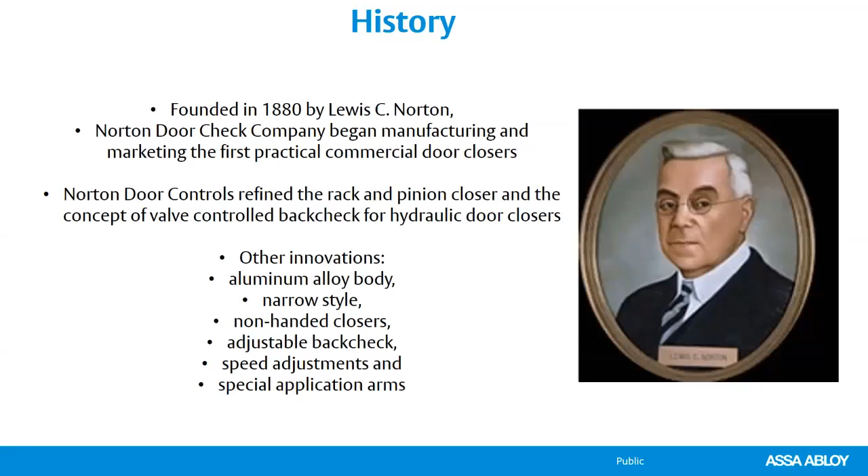Today we're going to talk about surface-mounted door closers. We're going to cover two different technologies: a rack and pinion closer, which is your standard door closer that you see out there, and also a cam action closer. Norton does a really good job of giving you sheets that tell you which closer model you should be looking at depending on your use, as well as the features available with that closer. So if you're looking at the vast array of closer options and trying to figure out which one to go with, we'll give you some tips and tricks on that. There are product selector guides like this, and I'll show you how you can find those online.

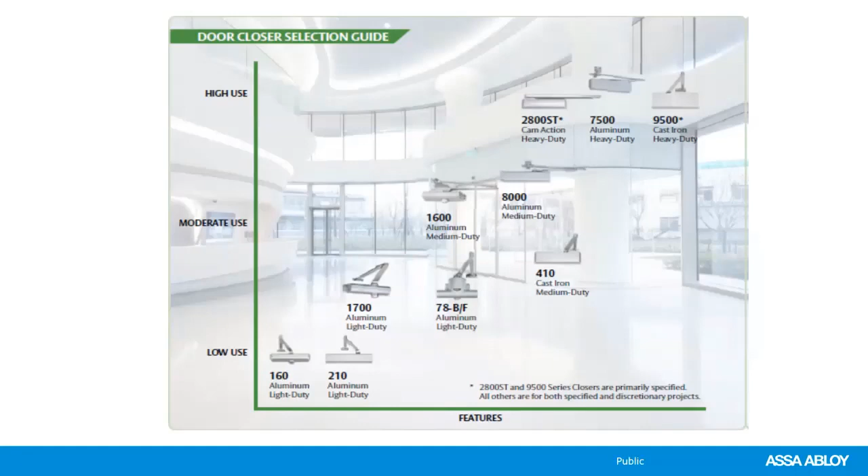They also have others—again, strength and quality versus functionality, durability versus features—to help you figure out which door closer is perfect for your situation.

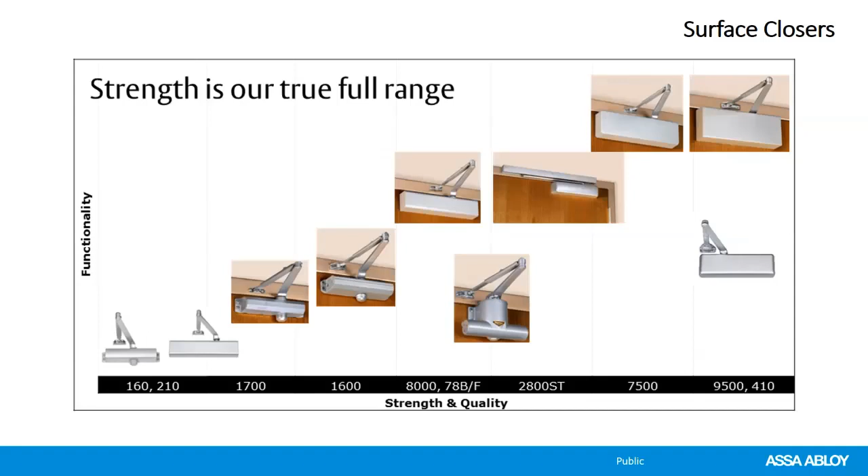First we're going to talk about our cast iron door closers. We're going to watch a video here in just a second that explains exactly what's happening inside a rack and pinion door closer—every time you open it and it closes, what's actually happening. So if you're a project manager walking a job site and door closers aren't working properly, this will give you an idea of what's happening inside. Then I'll talk a little later about some other things you can check.

So we're going to watch this video. It's about two and a half, three minutes long. We'll come back, I'll talk about the video for a minute, and then we'll get into some of our specific models.

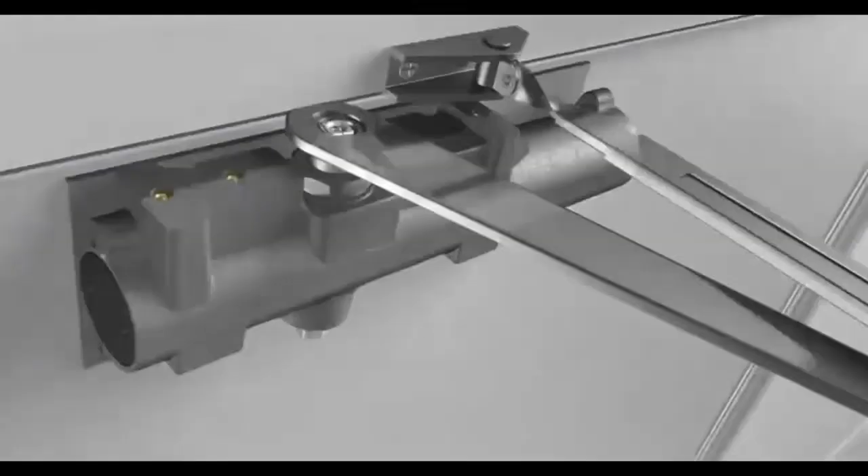Cast iron closers from Assa Abloy are rugged and reliable, providing millions of cycles with minimum maintenance. But the true durability test comes during those inevitable times when extreme forces are applied to the door and the door closer. Our single-piece construction provides uniform strength and wear resistance and eliminates potential leak points. Let's look inside to see what makes this cast iron closer so durable.

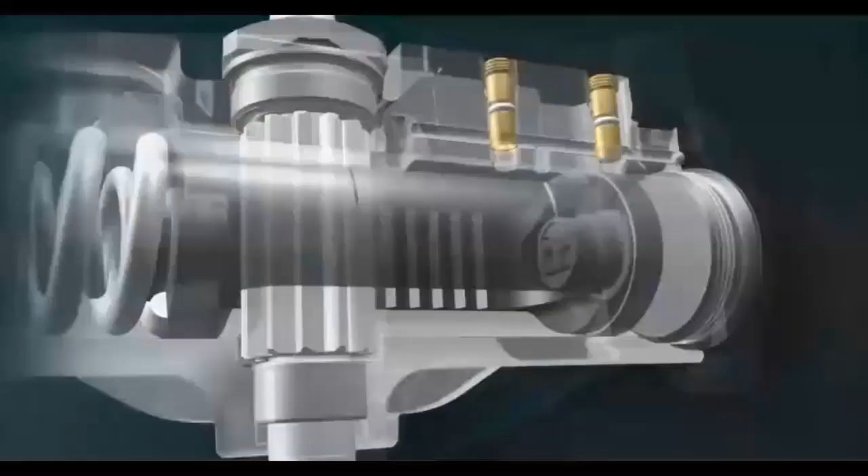Here's the basics. Each time the door is opened, the closer arm turns a pinion, which moves a piston inside the fluid-filled chamber. The speed of the piston is controlled by fluid passing from one side of the closer to the other. The valve controls the speed.

When the door reaches about 70 degrees open, oil begins flowing through the back check valve, gradually increasing the amount of pressure required to open the door farther. This cushioning effect is called the back check function.

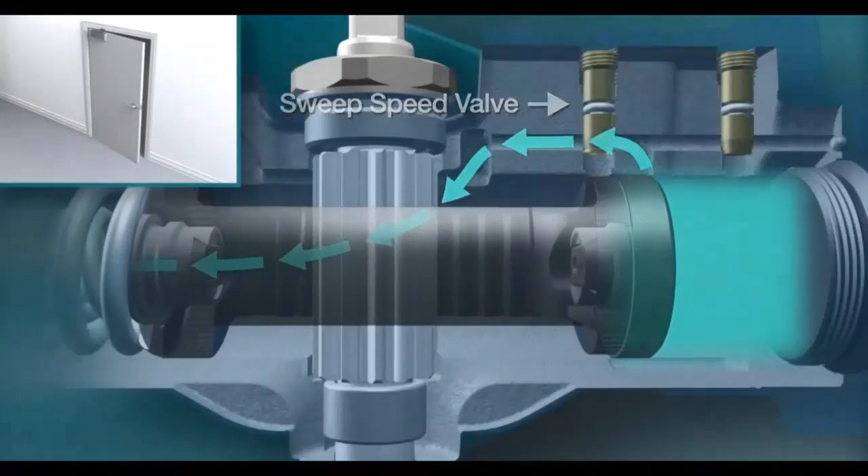When the door is released, the stored energy in the spring pushes the piston back. The fluid is now routed through valves that control the closing speed of the door. The sweep speed valve meters the oil flow from wide open to within about 7 degrees of closed. The latch valve then takes over, controlling the last 7 to 10 degrees of the closing swing.

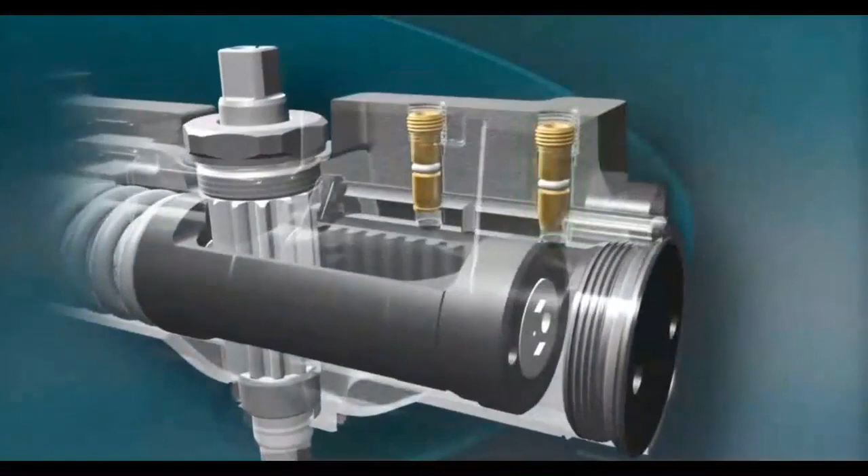The latch and sweep speed of the door can be increased or decreased to obtain the desired door motion. The spring adjust screw may be adjusted to obtain the appropriate closing force and accommodate varied door sizes and latching hardware. Our cast iron closers have easily accessible valves for adjusting back check, sweep, and latch speed functions.

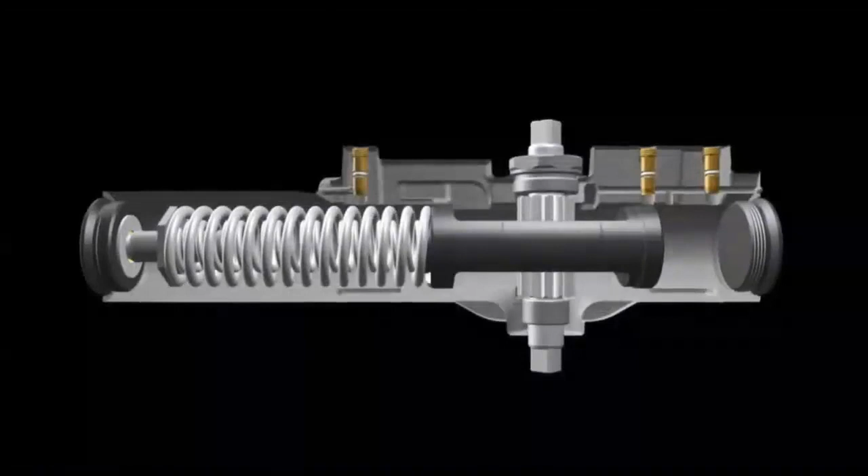During the closing motion, internal pressures seldom exceed 50 psi, but some doors are located in high abuse situations. Examples might be a city high-rise on a windy day, or school doors that children constantly force to close. In cases like these, extreme pressure builds up inside the closer body. With no way for the pressure to escape, that force can damage the closer, the door, the frame, and the mounting hardware. This is why our unique self-regulating pressure relief valves are so important.

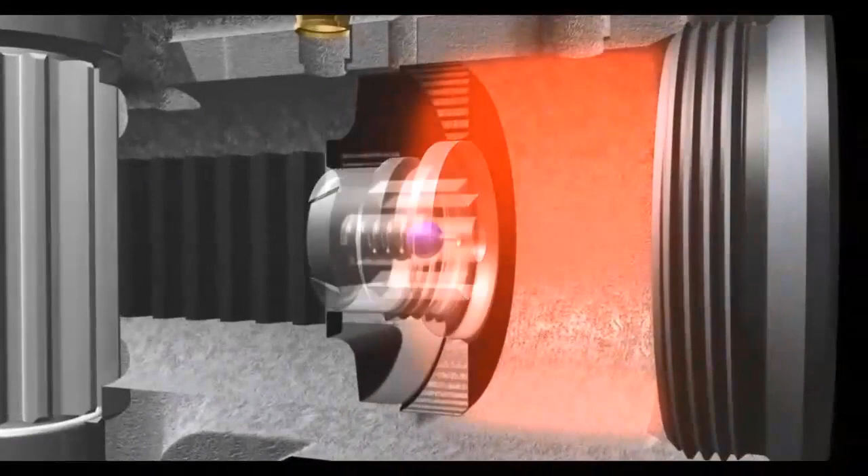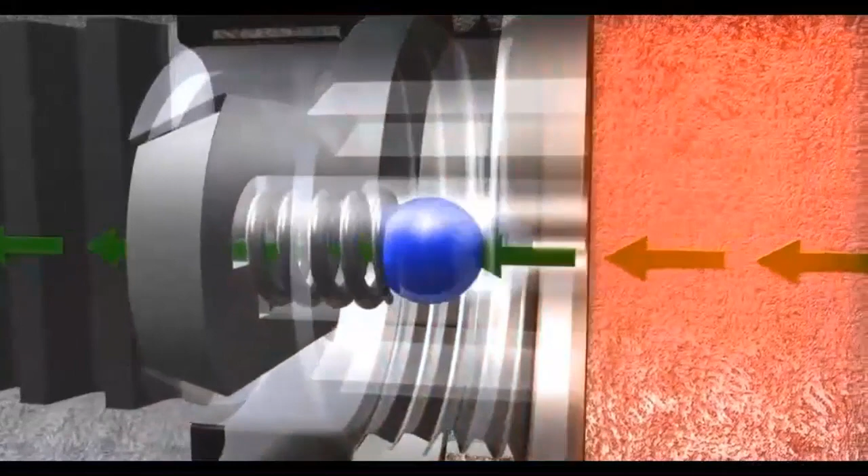Under abusive conditions, the pressure relief valve on the end of the piston senses the extreme pressure and automatically meters the fluid to achieve more normal pressure levels. The self-regulating pressure relief valve cycles rapidly during extreme pressure events to maintain control of the door. Once normal pressures are achieved, the pressure relief valve is no longer active, but ready for the next time the closer is abused. By releasing this pressure, the valve acts as a shock absorber, preventing damage to the door closer, the mounting hardware, the frame, or the door itself.

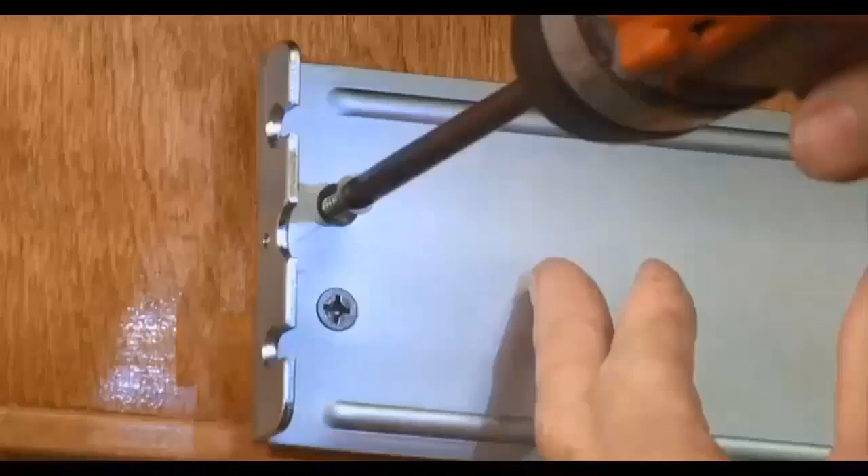Another unique feature for our cast iron closer is an independent mounting bracket. This bracket allows easy and accurate alignment. Simply install the bracket and attach the door closer. One-piece cast iron construction, the unique pressure relief valve system, and the independent mounting bracket—these are just some of the reasons our door closers last and last, cycle after cycle, year after year after year.

So that was our cast door closer. There were some specifics only found in cast iron door closers, but if you look at that door closer as a whole and just think of it as a rack and pinion door closer, then most door closers out there function that way.

Now the valves on different models may be in different places depending on what brand you're looking at, but if a door closer has latch speed, sweep speed—also called closing speed with some brands—a back check, and a power adjust, they would function about the same way.

Now, door closers are not built the same as far as the material they're made out of, the size of the piston—meaning the size of the piece inside that's controlling that flow—also the makeup of the steel in the pinion, the material the valves are actually made out of, the size of the adjustment wrench for those valves. So there are several things that change.

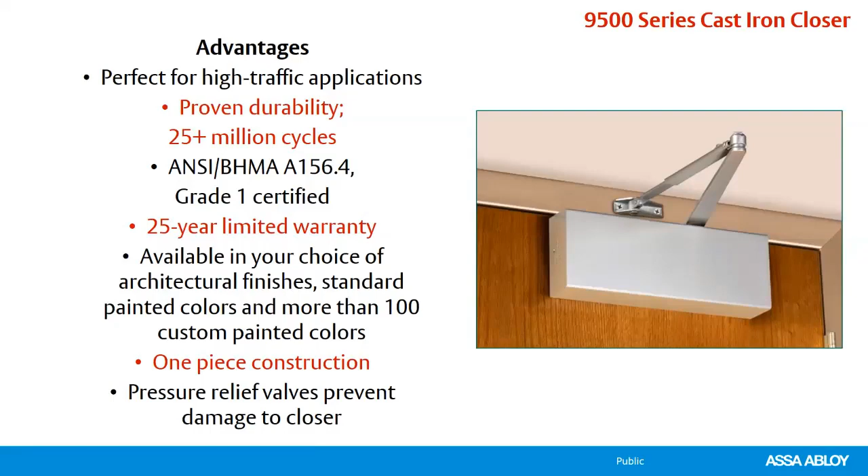Now, door closers are always handed to the frame, and they're not necessarily handed to the hardware itself. If your door or frame is a right hand or left hand, the closer would be handed to that. So we're not really concerned at that point if the closer is mounted on the exterior, on the push side or the pull side of the door. Closer is always mounted to the door and the frame, okay?

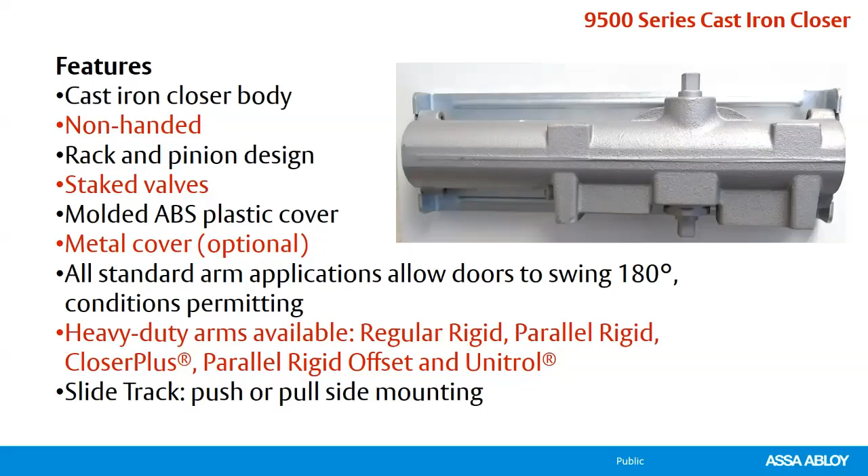We have several different closer models, and the higher priced, bigger, more durable closers are also going to come with more arm options. Some of those options are parallel arms, where if you just get the 9500, just part number 9500, by the finish, by the color that you want everything painted. It's a powder coated finish. You're going to get a tri-pack, and that's this up here. So that's parallel arm bracket, but if we take this bracket off, we can also use this arm for a regular mount or a top jamb mount. You could also get a tri-pack with a hold open, and that would be specified with an H in between the series and the finish.

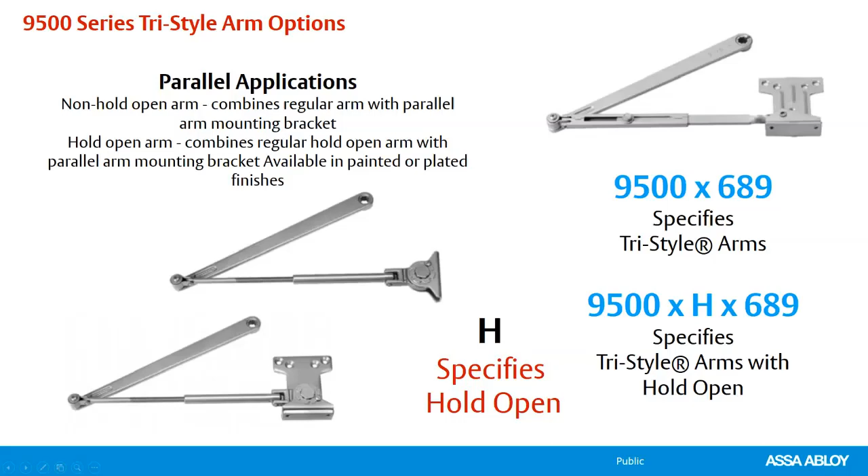If you're mounting top jamb, where I see closers mounted top jamb, that means that the closer body is mounted to the frame itself. The arm is mounted to the door, and that is on the push side. So where I see this is exterior doors, where the doors swing out into the public access in the direction of egress, where we want the most strength available for that door closer.

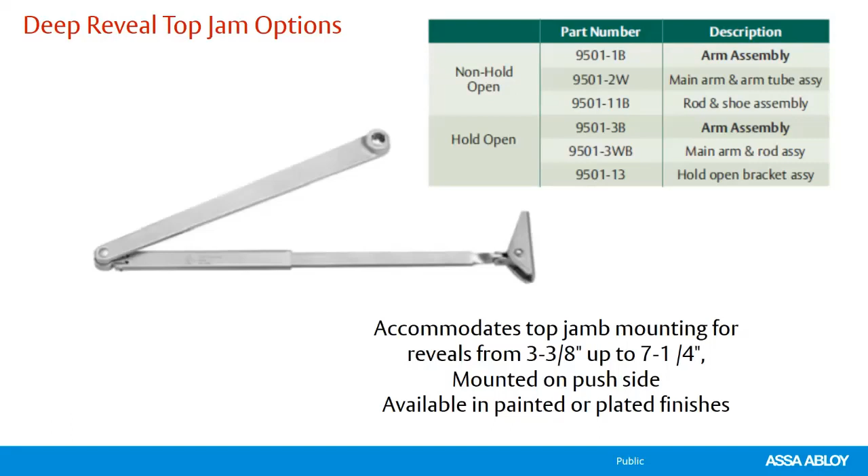So when we mean deep reveal top jamb options, we're talking about the distance from the face of the frame to the door on the push side. You need to measure that and make sure that the closer arm you're specifying with that model will accommodate that frame width. You can also get these arms that are rigid, heavy-duty arms. These are not adjustable, so the technician needs to make sure they do a really good job of reading the installation instructions and mounting that closer appropriately for that type of arm.

But these are paired with, if you pair this with our cast iron closers or even our Norton 7500 grade 1 closer, they're very, very durable. They last a long time. They're very rigid, and you would specify that as a PR. So parallel, P, R as in rigid. And you can get that with a hold open or a non-hold open.

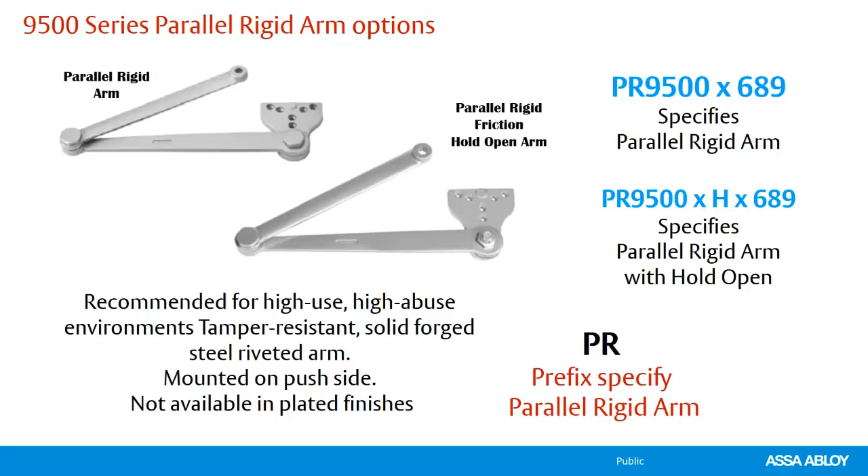A couple other arms I want to point out are the CLP and the CLP with a hold open. The closer plus arm is a rigid arm. If you look here on the screen, you'll see my cursor pointing at a stop. That's a hard stop, meaning if the door closer isn't adjusted properly and somebody swings the door open, it's going to come to an abrupt stop once it hits this. Now, this is removable - you could take it out completely, and you can also move it to the other side, so it's considered non-handed.

This is your holder option - a thumb turn where you can activate the hold open feature of that arm at whim. You need to make sure that if you're going to use this arm, you're not using it on a fire rated assembly. Even if that door is only rated 20 minutes, we can't have a mechanical hold open on that door, because if there's a fire, it needs to self-close and self-latch every time.

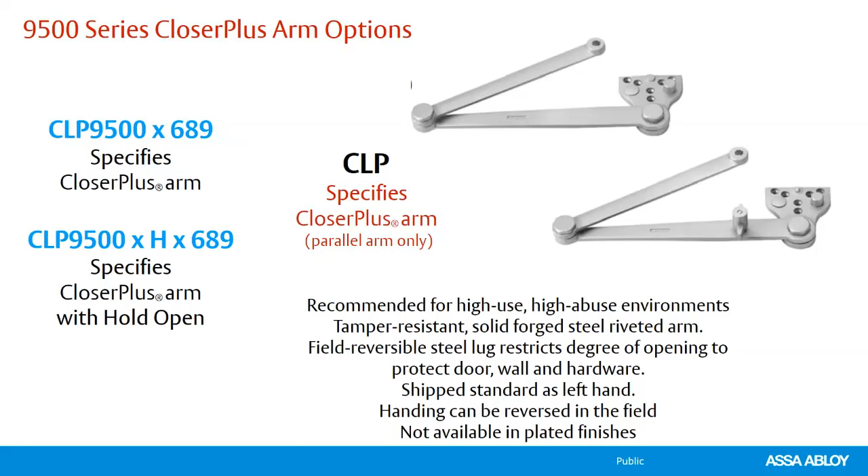If you have really high abuse areas and a really heavy door - your average hollow metal door weighs about 100 pounds, but you get beyond that up to around 250 range - I would personally recommend this Unitrol arm. I've used these myself in installations for years. They're awesome because they have a built-in spring, so when that door gets all the way to the stop position, that spring will absorb up to 30 pounds of that door force. We always need to ensure we adjust the back check appropriately for the door closer, but in combination with the proper adjustment and this closer arm, they work really well.

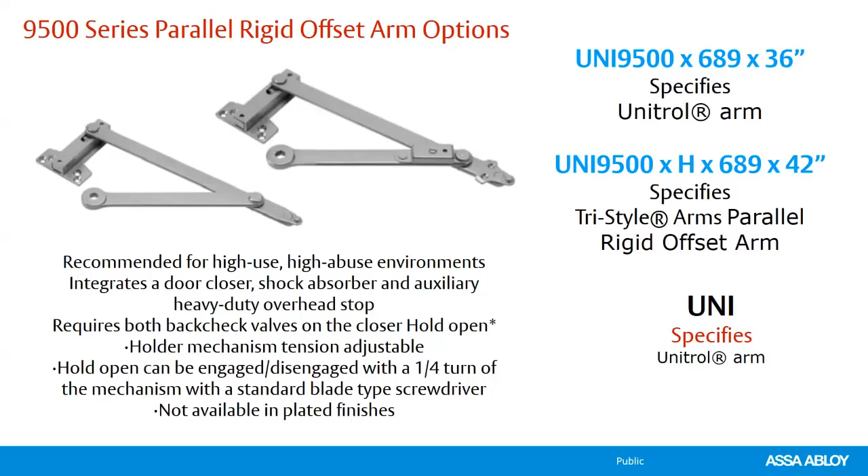Now the 9500 is also available in a slide track, either push side or pull side. You do need to specify the tracks are different. And in the sense of right hand or left hand, it will work on either, but you do need to specify push side or pull side to make sure you get the right one.

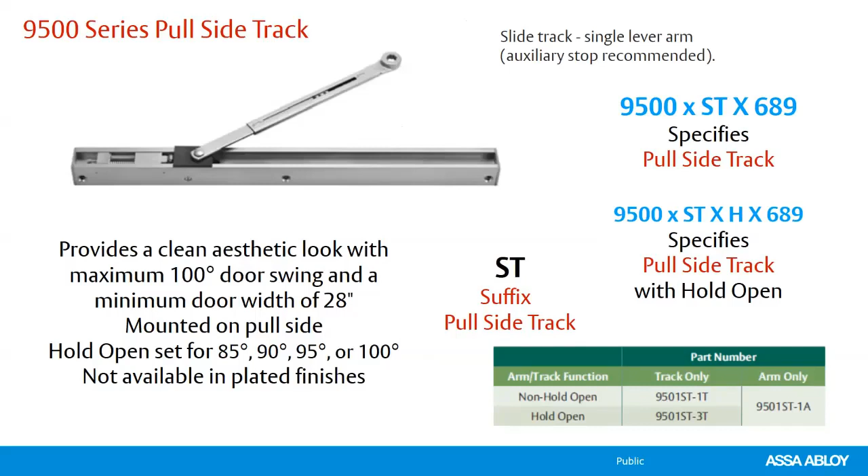These are also available in a hold open. So there's our pull side. As I mentioned, the plastic cover is standard - it's non-handed - but if you want a plated finish, you need to specify the metal cover, and that is handed.

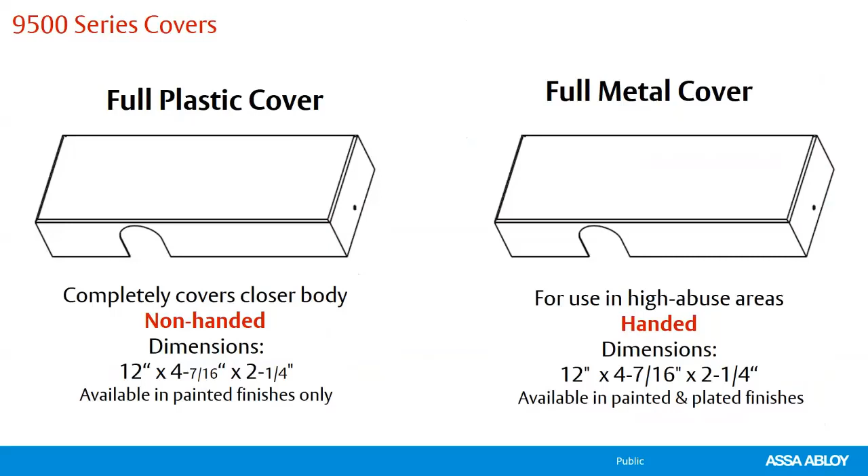We make drop plates for our door closers. Most of our models have this as an option, and as a previous installer, it's great when you get a drop plate for the specific door. If you have a door that you're mounting either parallel or regular arm, and it doesn't fit on the top rail because it's too narrow, this drop plate allows it to mount and makes it strong. Your door closer would actually sit down into the full light door. So you also have to think that you are going to see this drop plate through the door - if you're mounting parallel or regular, you would see it through the glass. That's something you have to think about.

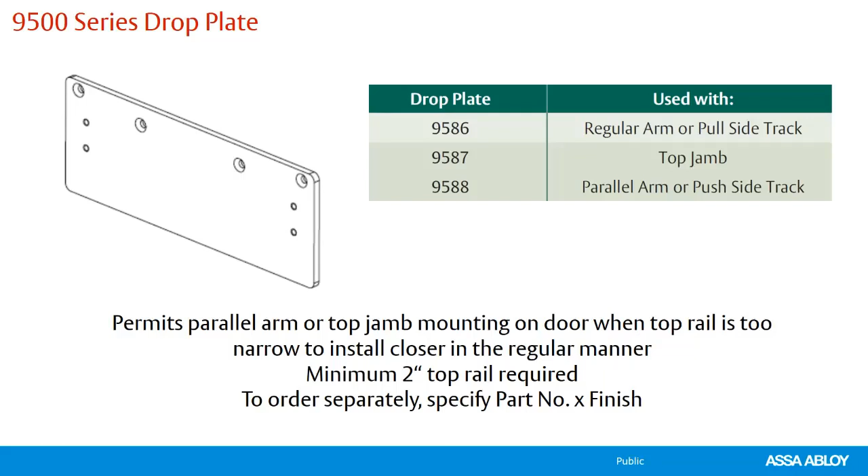At the end of all of our catalogs is a really good description of how we would order the door closers, with the prefixes, with the suffixes, with the body, and Norton follows this method all the way through all of their models.

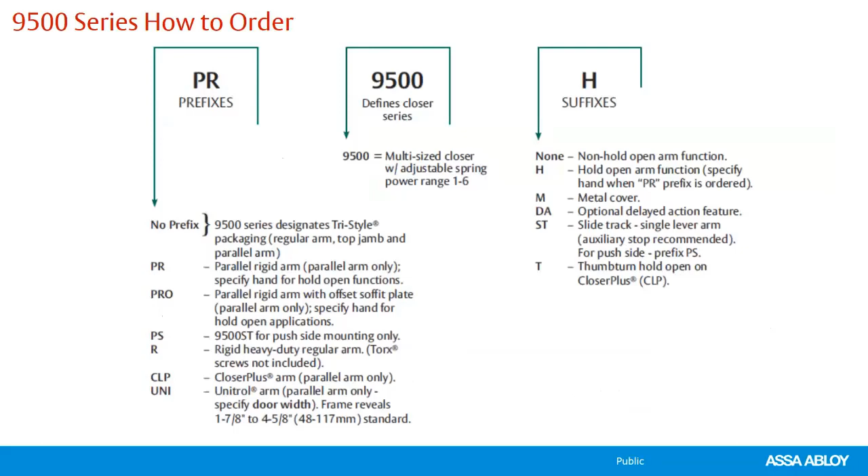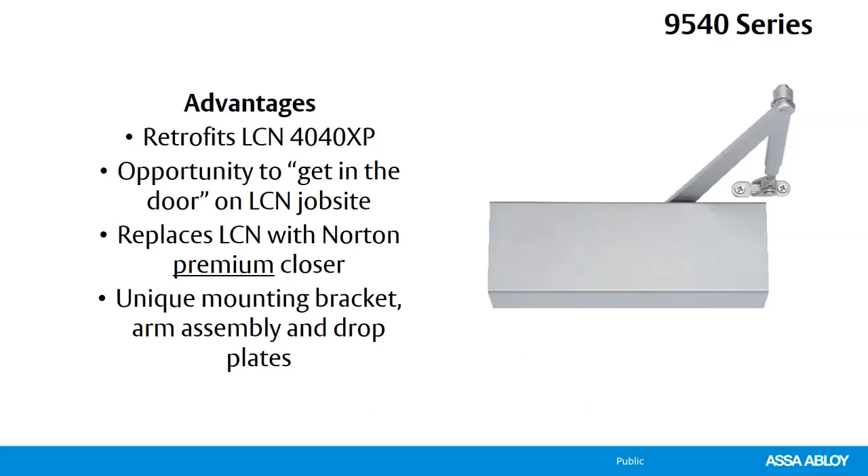Let's say that you want the cast iron closer, the heavy duty, the bracket mount, but you're replacing an LCN 4040. So the 9540 is the exact same closer as the 9500 series, but the difference is the bracket itself has different mounting holes, and it's designed to fit right over the existing holes that would be on the door for the LCN 4040 series. Same way we would order it.

Now the 410 series is also a retrofit for the LCN 4040, but instead of it being a bracket mount, this particular door closer actually has the mounting holes drilled through it that mount up directly to the holes for that closer.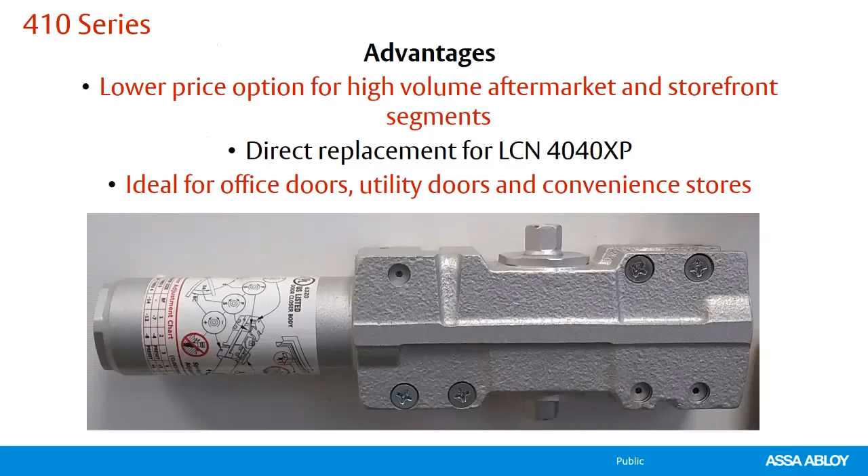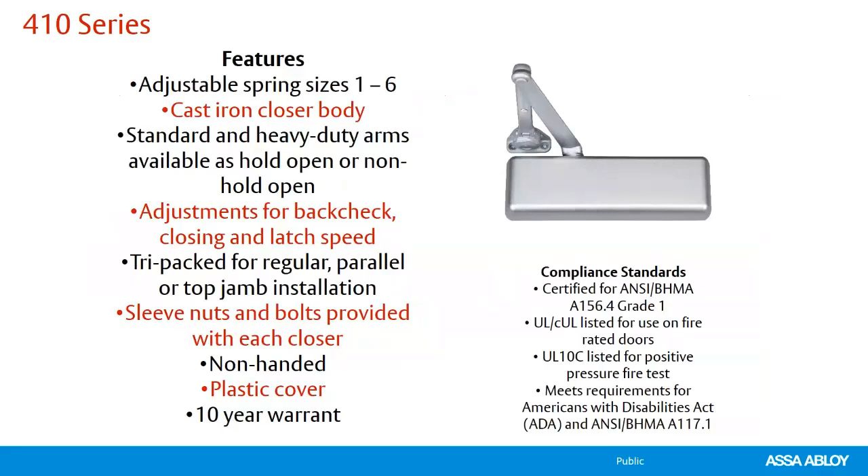10 year warranty, available in those standard mountings that I was telling you about - regular, parallel, top jamb, hold open, non-hold open. And again, the way that we order things follows through. Later on, we're going to show you how you can find all of these individual catalogs and how to navigate through them to get the information that you're looking for.

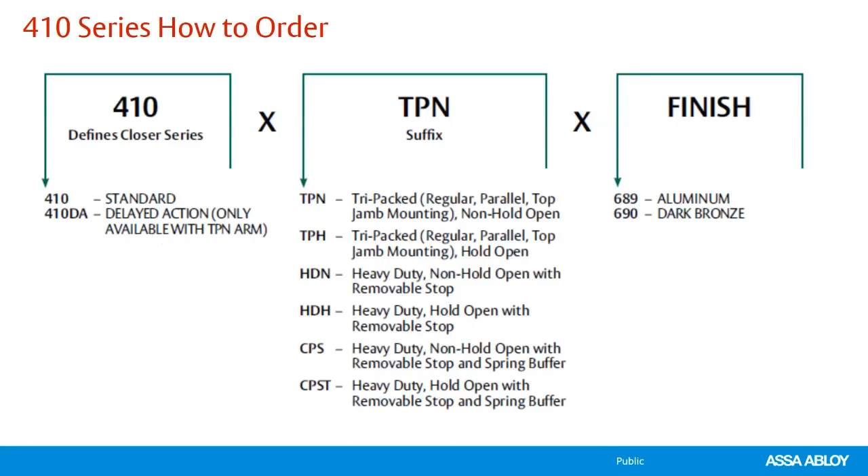So if we look at how we position these in the market, the 9500 is most often specified for new construction. The 9540 is a retrofit option where you need a really heavy duty closer and the customer has an existing LCN 4040 series that they're replacing.

We've got good doors and good frames, all we need is to replace that closer. And if you're looking for a little bit lower price point but the same footprint—we're not a bracket mount now, but we're still a cast iron closer—then you're looking at the 410.

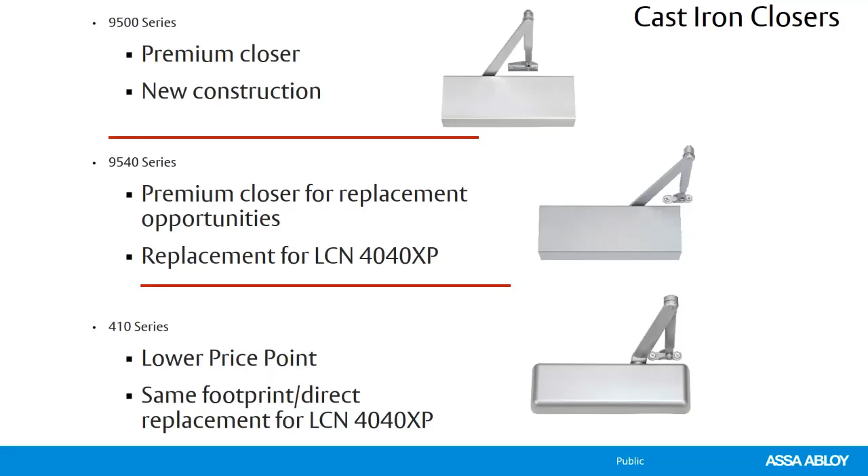So moving on to aluminum door closers from cast iron. Aluminum is a fantastic material, just like cast iron. We see them in BMW engines and all kinds of stuff.

The 7500 series is also available with our flash ship program, stocked in several different configurations. So check your local flash ship program for the Norton 7500 series. This is for high traffic situations and applications, again with a 25-year warranty, just like the 9500.

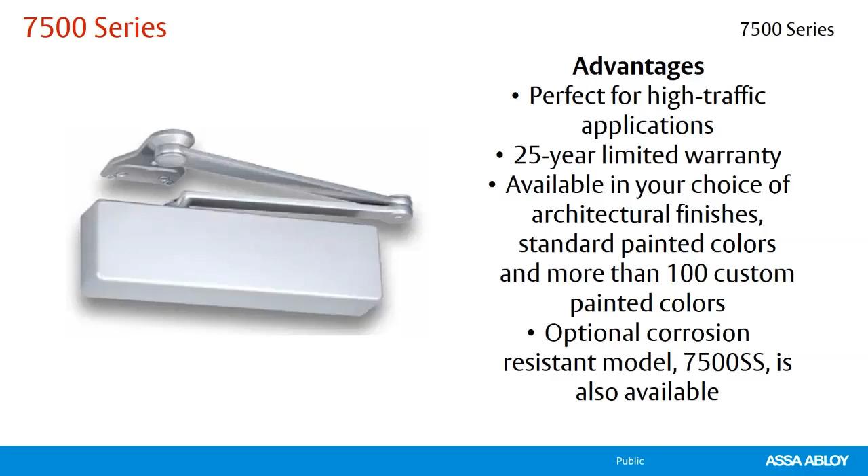We have an option of doing corrosion resistance with the 7500 SS. And when I mean corrosion resistant, I'm not talking about putting any of our closers, this one included, on the exterior of a building. I'm talking about if you're in an indoor swimming pool where the chlorine likes to eat everything around it that's made out of metal. Or you're in a chemical plant, pharmaceutical companies, places like that where they're dealing with moisture, spraying down floors, food service. You can get this extra coating and it helps with corrosion.

This door closer, along with the 9500 series, is available with a back check position valve. Back check, remember, is to slow the door when it gets opened right around the 70-degree mark—that's where our back check valve starts to engage. Of course it's adjustable, but if you have really high abuse, lots of wind, you can make that back check engage a little bit sooner than it would otherwise.

We also can have what we call delayed action—if we look here, it says DA for delayed action. Let's say that we're moving hospital beds, carts, or ladders through the door, something like that. That delayed action can keep that door open for up to 4 or 5 minutes, depending on the angle in which we open the door.

But most of the time these doors are going to be opened to, let's say, 90 degrees. That gives you about a 2-minute window where that door will just barely creep closed. Once that 2 minutes is up, then it switches to your regular sweep closing speed valve, and then your latching speed as normal.

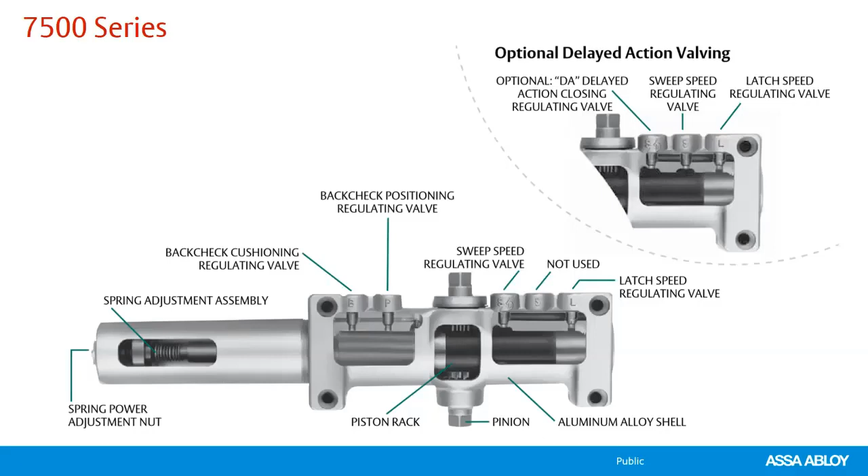Still available as adjustable 1 through 6. We have staked valves—the 9500 does as well. And staked valves just make sure that it's really difficult for an installer to accidentally turn a valve the wrong way. So let's say that you're adjusting a valve with your hex wrench, turning it, you think you're turning it clockwise to slow the door down.

But because you're working kind of upside down and your hands are up on the top, you may actually be turning it counterclockwise. I've seen it multiple times in courses where people think they're going one way, but they're actually going the other. And those stakes help prevent that valve from being removed.

I remember just a few years ago, about 4 years ago, I was doing a training class. I was working with one group of students on a door closer, we had another group working on another door. They did just that—they forced that valve even past the staking, turned it really hard, got that valve all the way out, opened the door really fast, and then squirted oil all over the ceiling of the training facility. It's kind of funny at the time, but it proved a point.

The stake valves are definitely necessary, but if you work really hard, you can get that valve out. Now, if the doors are leaking oil—and I think everybody on the call has probably seen a commercial door that has oil dripping down the door, the glass—that door closer needs to be replaced. It's a liability issue. You never know where the air bubbles that are now in that door closer are going to work through a valve.

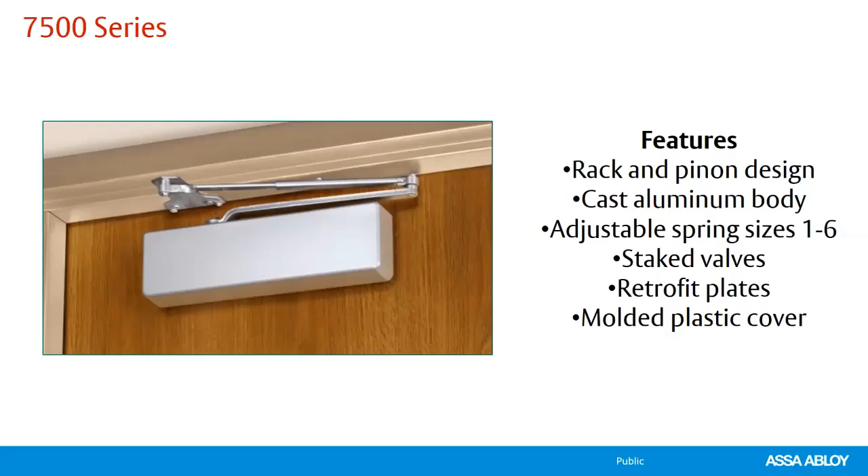That back check position I was talking about—that enhanced back check—lets you move and adjust that for doors that have a lot of abuse. And then our delayed action, this gives you an example of what we're looking at. If you template that door closer to 180-degree open and bring it all the way to the wall, then you can get 4 to 5 minutes of that closing speed delay.

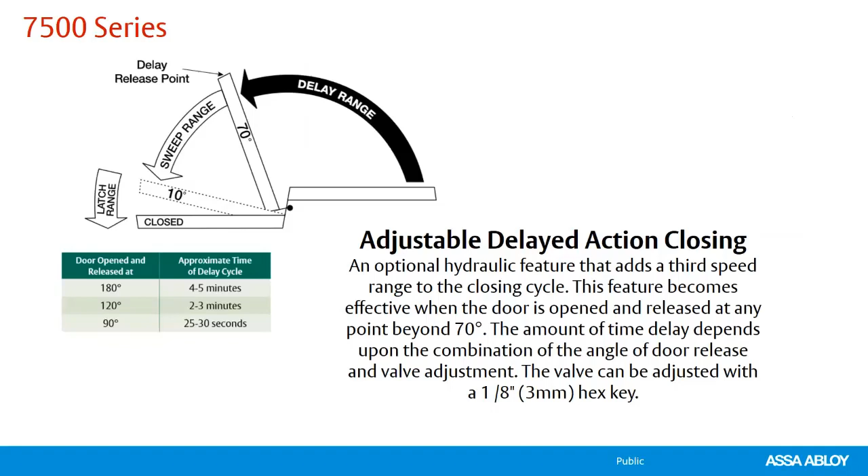As I mentioned earlier, the 7500 is available in a tri-style. So if you're stocking this closer, if you're buying this for a job and you're not quite sure what the customer needs yet, on what side of the door the closer is going to be mounted, everything you need for that is in that box.

Just because of the leverage of this arm sticking parallel off the face of the door, it has length to control the door. So if you have an exterior door swing, and you need all the strength available in that closer, I personally would recommend doing a top jamb if it's feasible. If you're able to mount that closer on the frame and you have a reveal that will work with your arm, top jamb will give you more strength to get that door pulled in and latched.

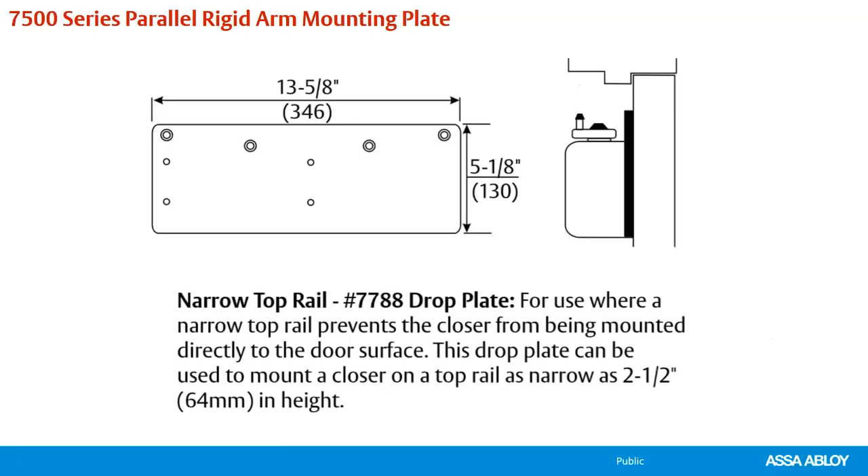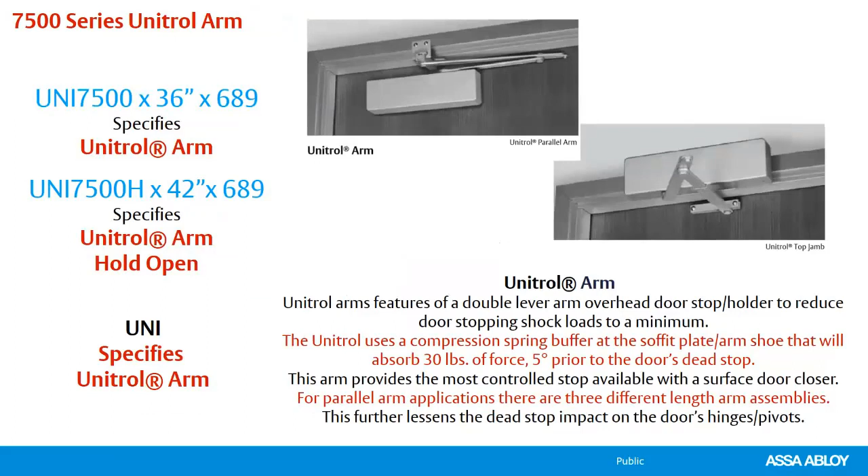The CLP, the Closer Plus arm, is also available with the 7500, as is the Unitrol arm, that arm that has the built-in spring to absorb some of that impact. Slide track, both a push and a pull side.

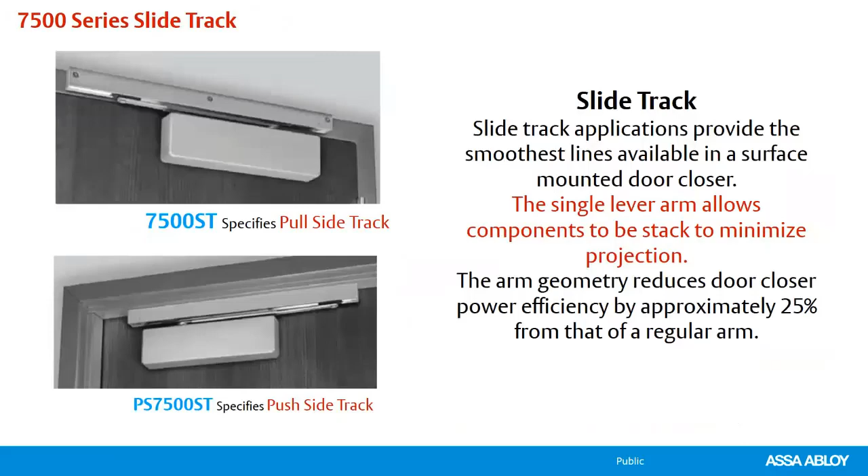In this chart, Norton is fantastic with charts. This chart tells you what type of fasteners you're going to get with the pack. And you'll see that with certain arms, some of these screw packs are standard, right? And some of them are optional.

If you have a door that is not reinforced, a wood door, flush wood door that's not reinforced, then you're going to want to through bolt it. If an architect specifies doors and distributor orders doors that do have the reinforcement, and then the technician goes ahead and puts through bolts, that may make somebody mad. I have seen where doors had to be replaced because they used through bolts, and the technician did not know that there was a reinforcement block for that closer to be mounted to.

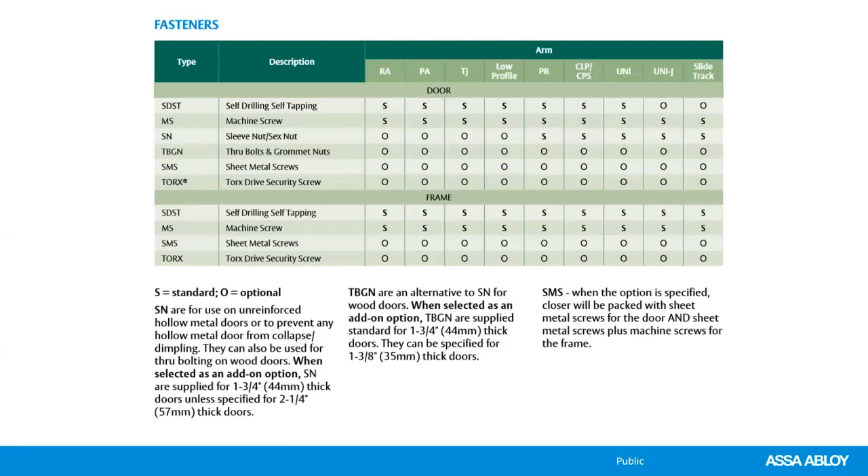So communication is key when you're going either through bolts or not. Personally, I like the through bolts, especially on wood doors, and even sometimes on thin hollow metal doors. There's just not a lot of material there for those screws to bite into. If you have high abuse, high use, those through bolts, or what they call sleeve nuts, are definitely a good addition.

We have a multitude of finishes and colors that you can get these door closers, either powder coated or plated. And if you have something custom, Norton does a lot of custom coatings as well. So if you want something that's a custom color for your high school basketball team, or for a professional stadium, they've got a lot of options. Just get in touch with Norton and they can tell you what the process is for getting that quoted.

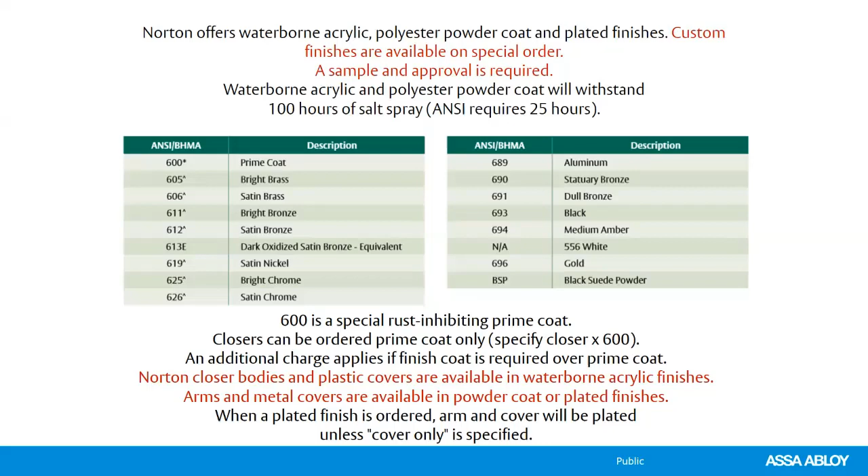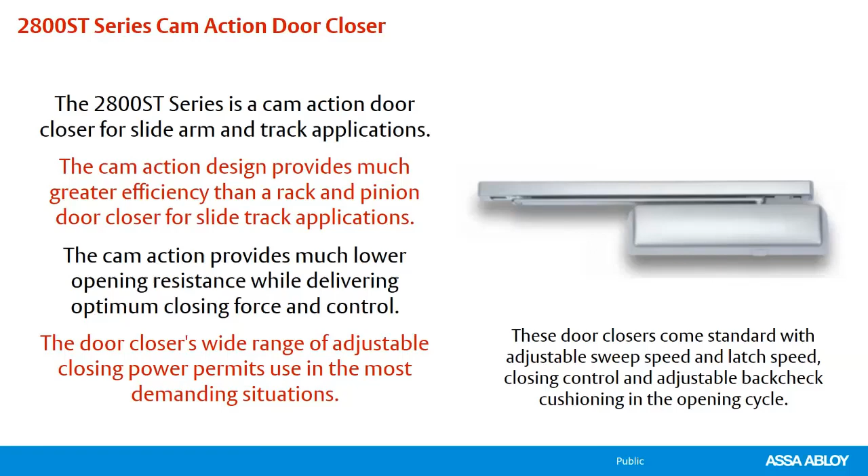Moving away from the rack and pinion closers for a second is the 2800 ST. This is a cam action door closer. Cam action door closers are super efficient. They don't increase in force on the user through the opening cycle, but on the latching cycle, they increase just at the very end to make it easy for the door to shut, giving it more strength. We're going to watch a quick video on that, explaining our cam action door closer.

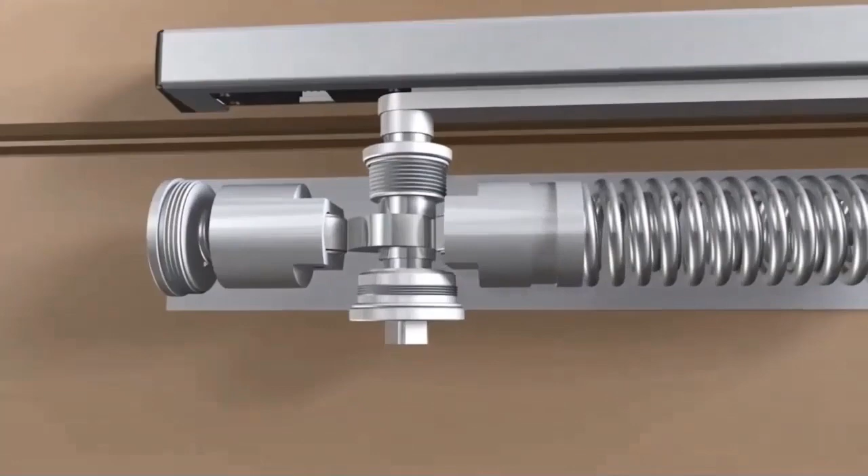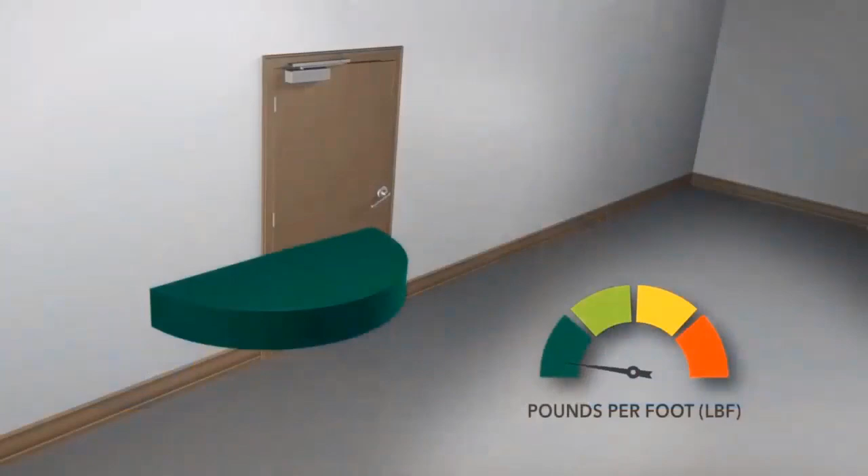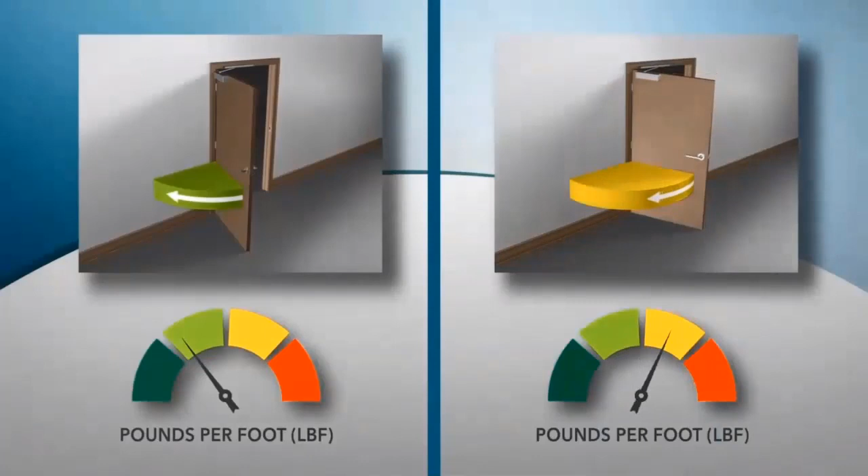The Norton 2800 ST cam action door closer features a revolutionary design that combines the aesthetics of a track-type closer with superior performance. Our cam action closers are incredibly efficient. The secret is this unique cam assembly. Closing forces are applied to the spindle through the continuously smooth surface of the cam and roller bearing follower. The combination of the piston and cam design greatly increases efficiency. The results are astonishing. On doors equipped with cam action closers, the strength required to pull the door open remains easy throughout the entire opening range. On doors using a rack and pinion closer with a track, the effort required to open the door rises exponentially as the door is opened.

There's also a difference in how each door will close. The cam action closer applies a consistent amount of force across the entire closing range, and the closing force actually rises at the last moment, right when the door needs extra force to set the latch. The force of a rack and pinion closer with track decreases as the door closes, providing the least amount of force at latch. Simply put, the Norton 2800 ST cam action door closer is the most efficient surface-mounted door closer on the market today. This means that a door equipped with this closer will feel light to open, yet still have plenty of power to overcome light stack pressure or other problems at latch. Norton cam action technology, combining the very best in aesthetics, performance, and innovation.

So where I see this used most often is when we want a super efficient door closer that is very aesthetically pleasing. The door closer kind of blends into the opening, and once you get it plated or finished in the color that you want, that can even help it disappear even more.

But if you think about the Americans with Disabilities Act on interior non-fire rated doors, you have a limit of 5 pounds force to open that door. So if I'm a user, come up to that door, unlatch it, and start opening it up, the amount of force cannot exceed 5 pounds. That's really hard to do on heavy doors, especially when we increase the power screw. That can get to a point where we're at 8.5, 9, 10 pounds of opening force. We'll fail an inspection.

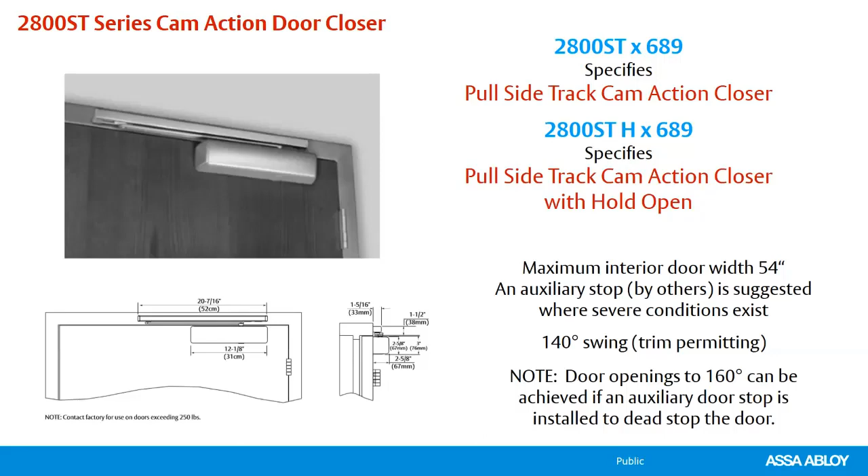Again, drop plates are available with most of our closers, and here's an example of how you'd build the part number string.

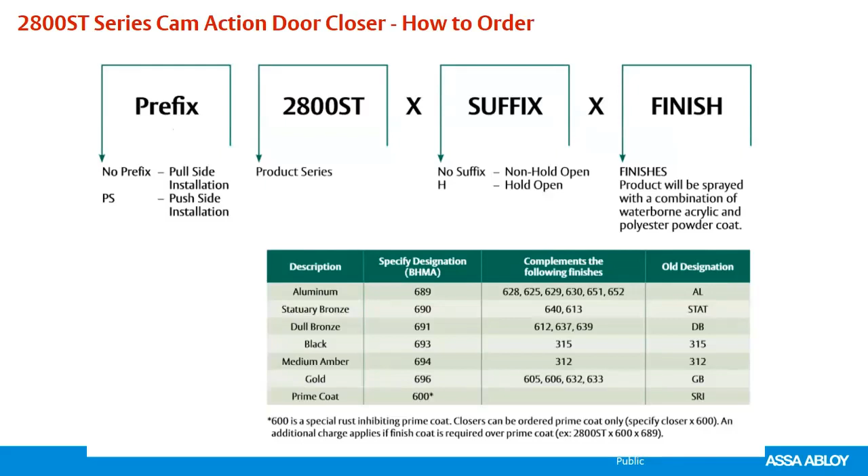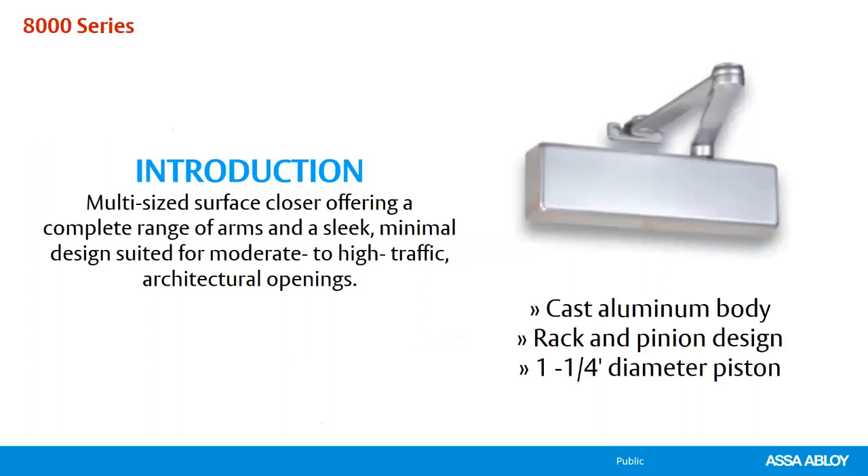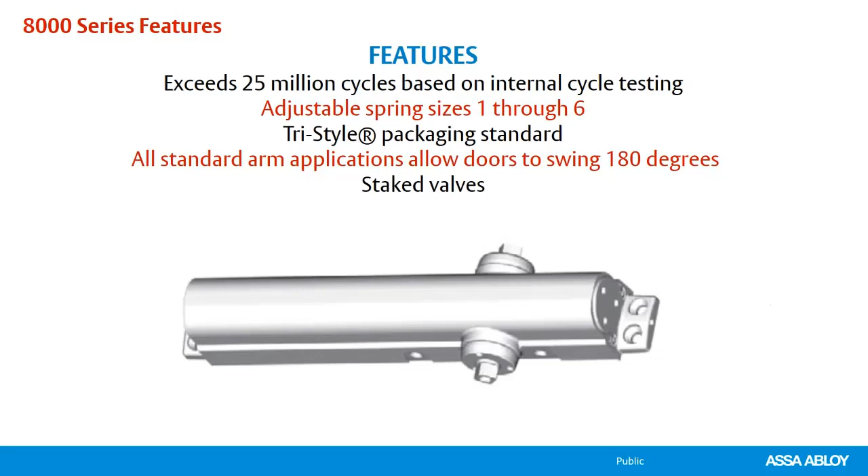Okay, moving on, the 8000 series — we're moving down on the cost and the usage from the 7500 to the 8000 series. It's very low profile, it's sleek. You can get it without a cover, or with a full-size cover or a narrow cover. There's a view of what the closer would look like without a cover. It's also the exact same mounting pattern as a bunch of other competitor closers, and we'll actually get to a chart later on where you can see exactly what I'm talking about with that.

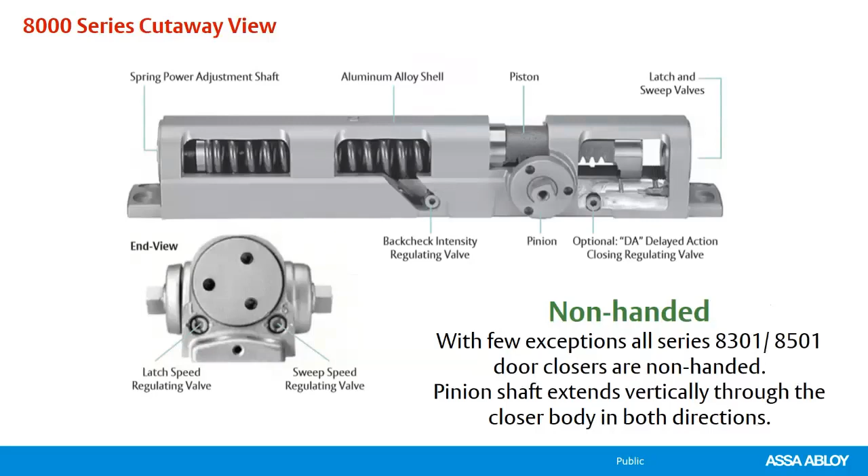Back check intensity valve is standard. Delayed action is an option. Your latching speed, sweep speed, and power are all standard.

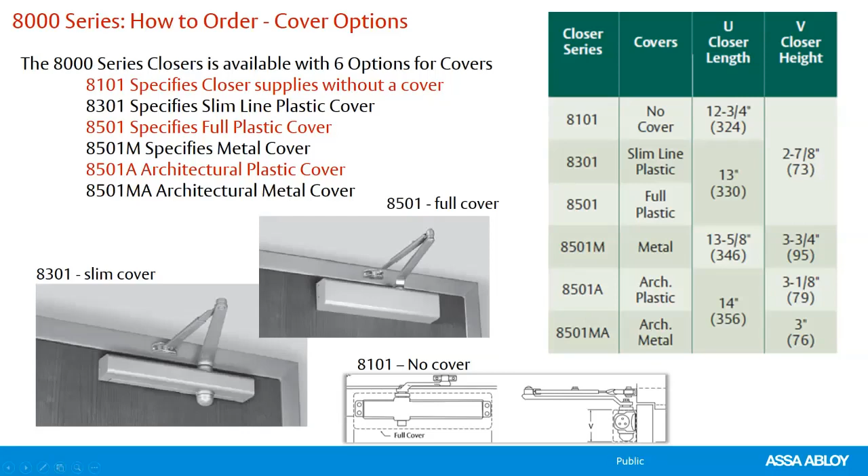And lastly, we're going to talk about the 78 series. This is considered a traditional closer, but some people call them a potbelly closer. Norton is one of the only manufacturers that still makes these, and year after year they're becoming more popular for those historical restorations of incredible buildings out there. When you want something that looks the part but has some modern components and modern functionality, this is a great option. As well, you can get these with a corner bracket that will work on arched doors.

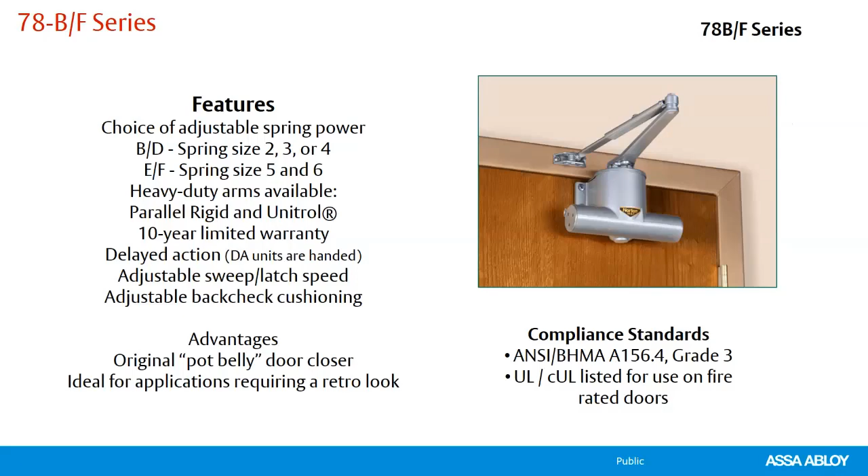10-year warranty, you can select the spring sizes. Available in parallel rigid and Unitrol arm, and again, you can get that corner bracket to work arched doorways.

I've used this one specifically for an old church. The church was about 100 years old, had these fantastic wood doors, and we were able to make it work with a door closer on that arch opening. It was a great application, and as far as I know — this was, gosh, 15 years ago — it's still working to this day. It's one of my favorites.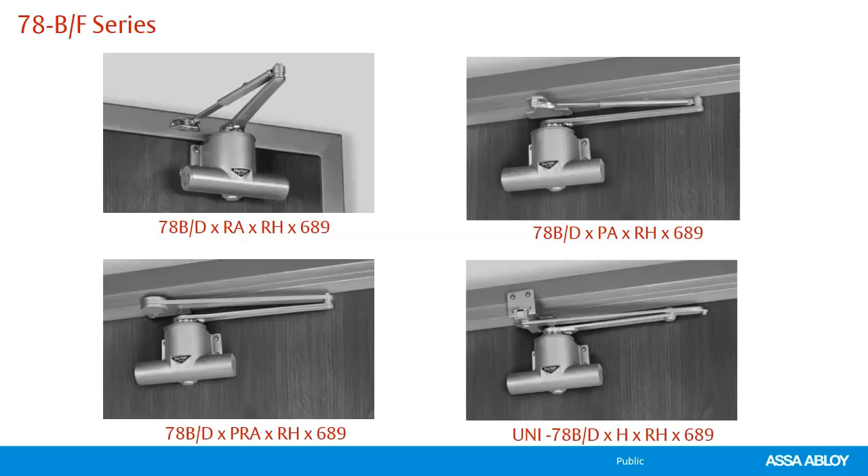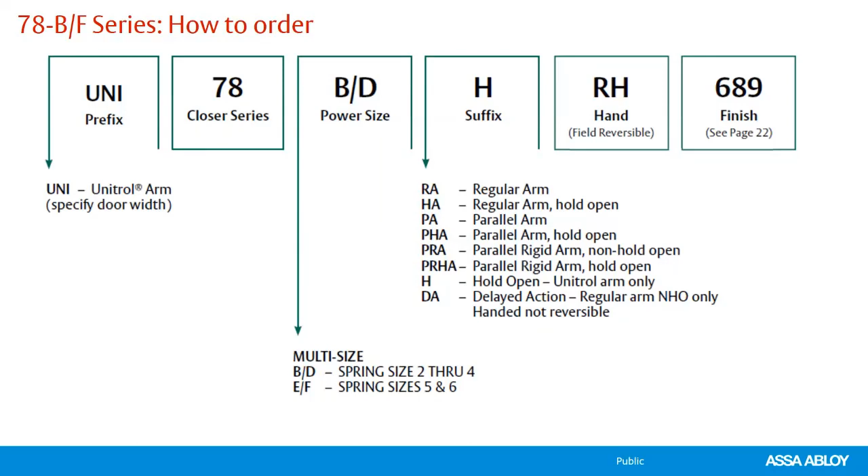So this brings me to some digital tools, right? I can spend all day giving you part numbers, but that's not really the way that I learn. I learn by understanding how I'm kind of built, but also where I can find information. And you can find information at our ASSA ABLOY DSS website and click on Resource. So we're going to do that now.

Let me show you what I'm talking about. Right here at the top it says Resource Center — hope everybody can see what I'm looking at. If you click on Collateral Materials, come here, select Segment, and just click on Product. That'll allow you to select the brand. So right here, I'm clicking Norton Door Controls. That will take you to Norton's website. You can go click to Catalogs here on the left-hand side.

This takes you to their digital library. Okay.

What I wanted to highlight is right here on the right-hand side, the Norton Door Closer Reference Guide. If you're a stocking distributor or wholesaler trying to figure out what the customer brought in—maybe it's a door closer without a name or model number—this Door Closer Reference Guide is perfect for that.

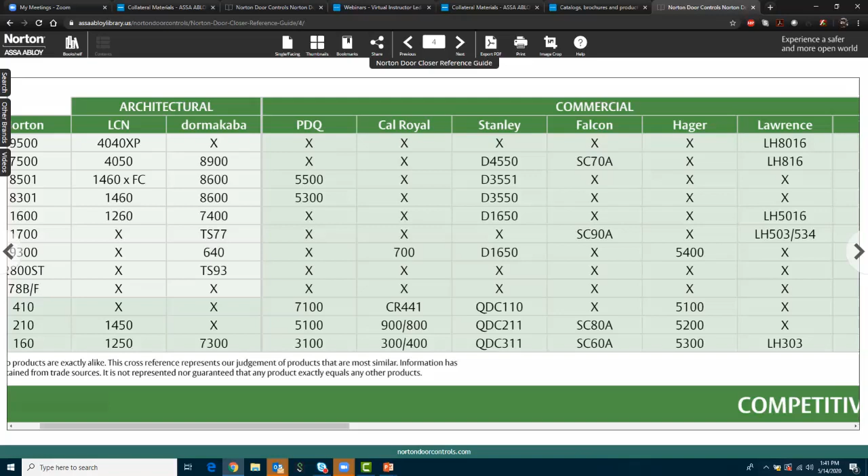So we can look here at the Norton part numbers, all of the series, and it gives you all of our competitors that closer would replace.

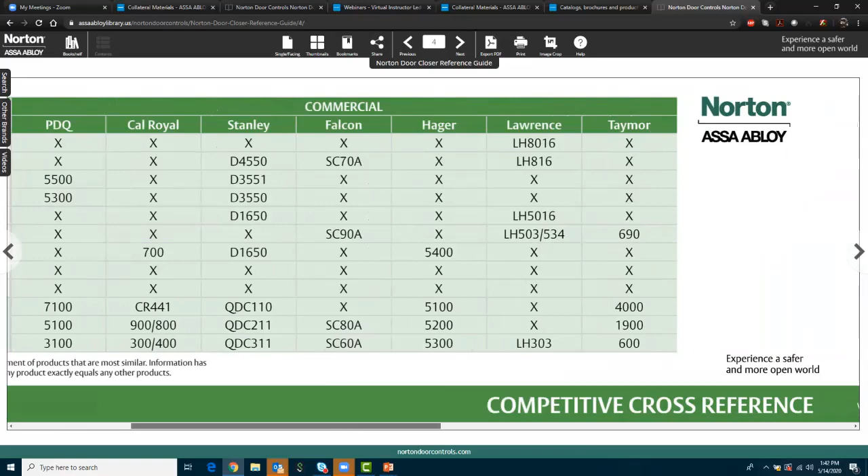I'm going to zoom out here, and you see that this actually gives you the measurements of that particular model. So if we look at the bottom, this is a 1600 series, and these are the measurements for the mounting holes. Get a tape measure, measure the door closer the customer brings in, and reference that off of this template. If you order this from us, it actually comes full size so you can lay the closer directly over the template to figure out which one it is.

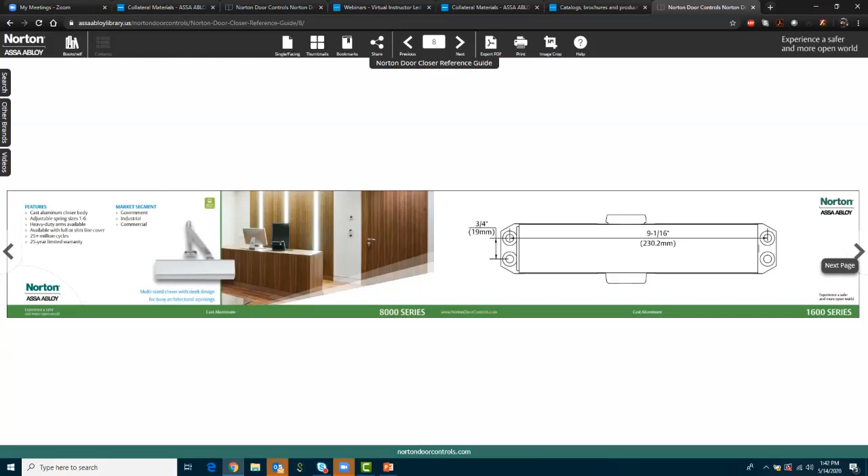It's a great little reference guide, great tool. If we go back up to bookshelf, that'll take us back to our catalogs. I'm going to click on one catalog to show you really quick how this works.

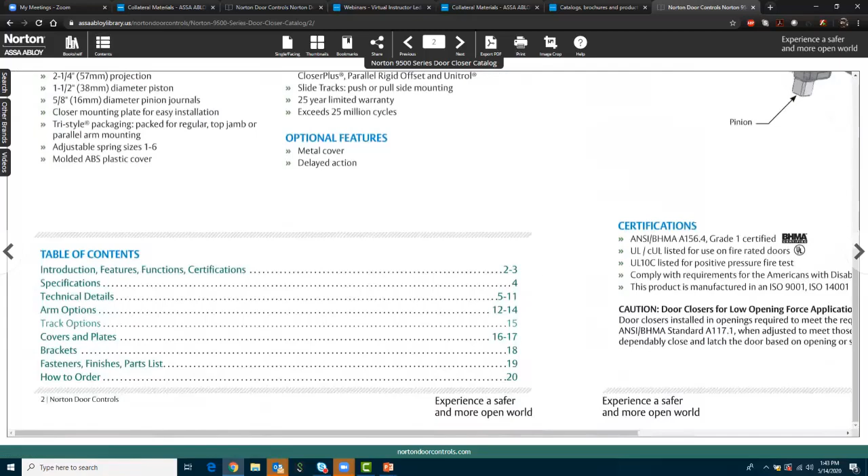If you click on contents at the top left, our table of contents is hyperlinked to the specific area. So I want to look at ARM options for the 9500 series. I can just click there, and it gives me all of my different ARM options and an example of how I would order that.

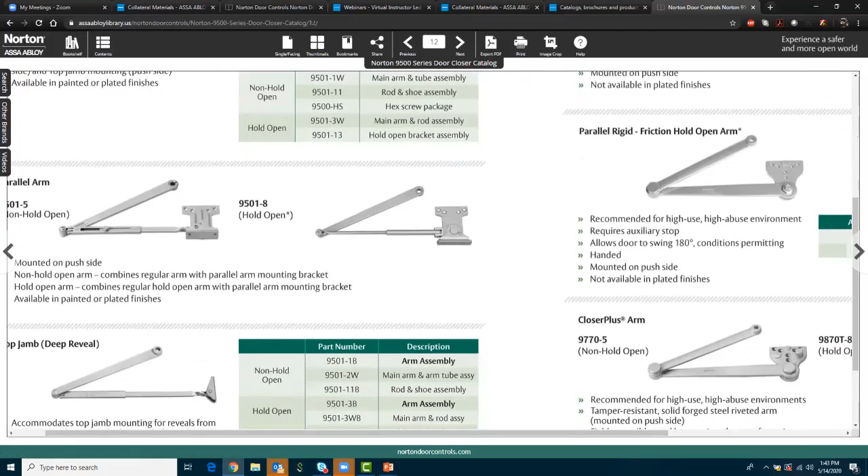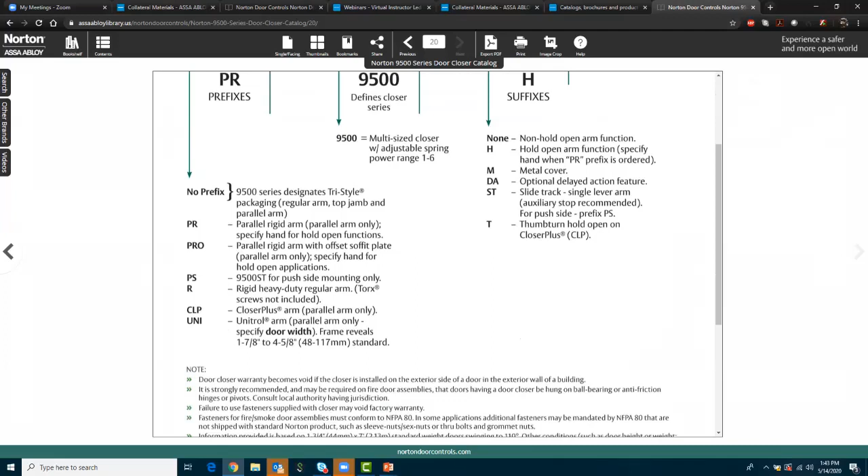Going back to contents, I can click on how to order, page 20, and it takes me directly to page 20, giving me all of my options. Going back to our DSS page here, dss.com, and clicking on support tools,

you can see that we have the ASSA Abloy customer support app and BILT Intelligent Instructions. The ASSA Abloy customer support app is what you would use on your phone to get right here. This will take you to the resource center where you can find all your catalogs, installation instructions, and templates for all of our products.

It's completely free to download. It also allows you to get in touch with our tech reps and customer support agents, and you can stream live video with a tech rep so they can see exactly what you're working on if you're on site somewhere.

If you're on a desktop, then this is where you want to live. Resource Center gets you to all of your different brands, catalogs, and other information. If you're on your phone working a job site with your tablet or cell phone, the customer support app is definitely a must.

If you go to your Play Store or App Store and just search ASSA Abloy, it's the first one that pops up every time I've searched it. And if you're installing access control products, auto operators, and other products, you can click on BILT Intelligent Instructions or search that, download it, and it gives you a 3D interactive how-to guide for getting a lot of our products installed.